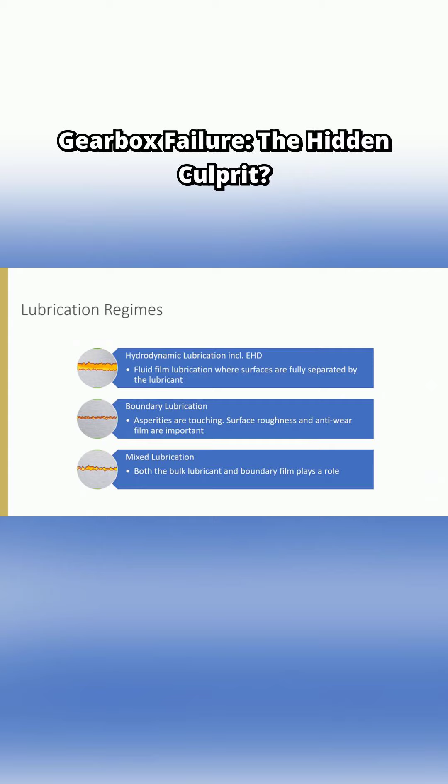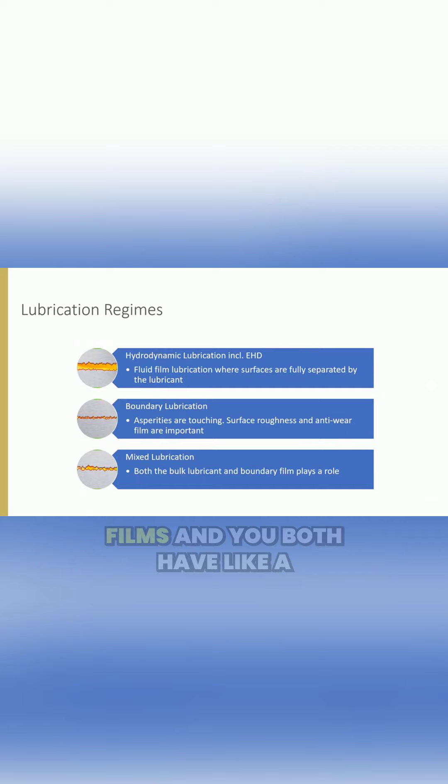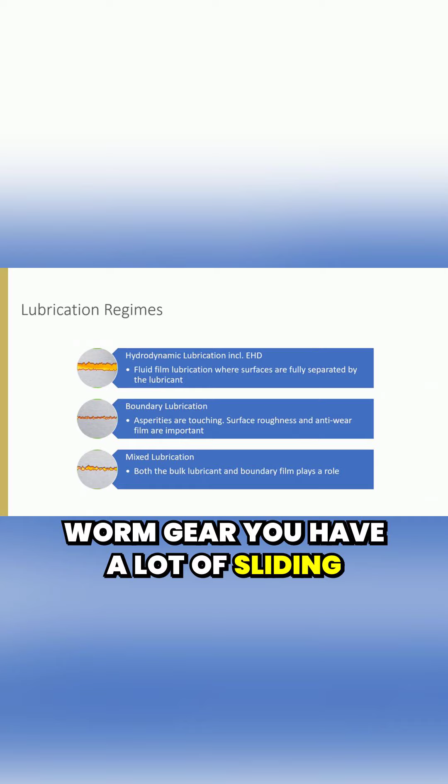So one of the worst things for boundary would be a gearbox where you start and stop the gearbox, and also in between the teeth you have a lot of very, very high pressure and therefore very, very thin oil films. And you have both rolling contact and sliding contact. And especially if you make the gears like that, so a bevel drive or even worse, a worm gear, you have a lot of sliding and therefore you need additives. Otherwise, you're going to break down the gearbox.

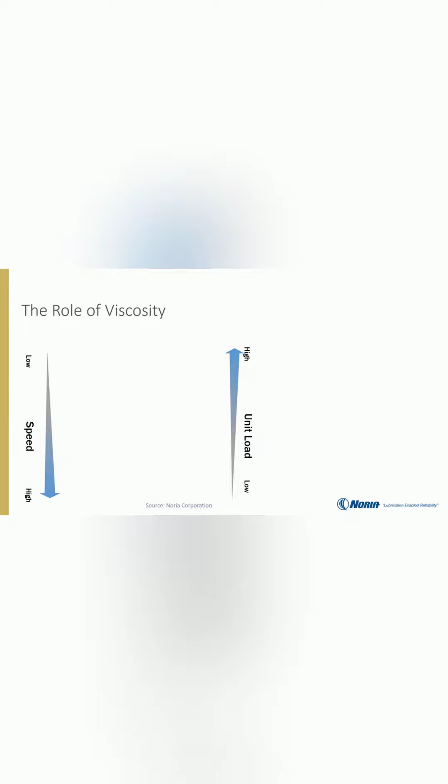Yeah, so one of the primary things for an oil, yeah. It goes through all three of them. You're right. Yeah.

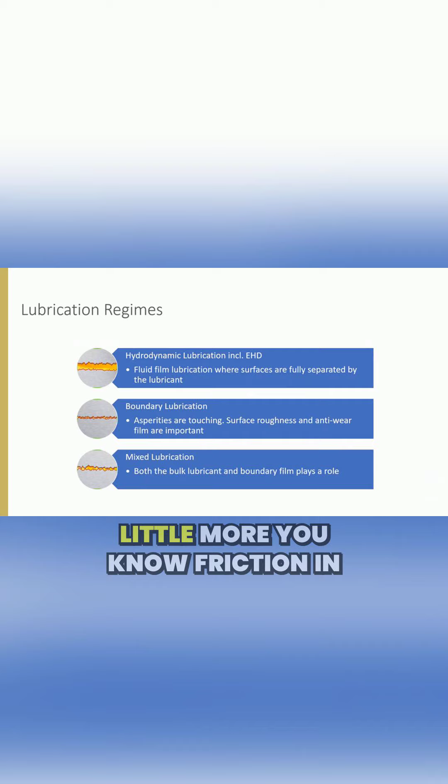Yeah. You could actually, let's say, like you say, 320, the oil is 320 normally designed for this gearbox, but to help me out, maybe because it's running very hot, I go to a 460 oil, and then I have less boundary lubrication because then I can carry more load because the oil is thicker. But then, of course, I'll also create a little more friction in the pump, and I'll also maybe create starvation in the pump if I can't suck in the oil.

I mean, if it's too cold. So there are also drawbacks. So sometimes additives are actually the best solution. Yeah, but good question. Thank you.

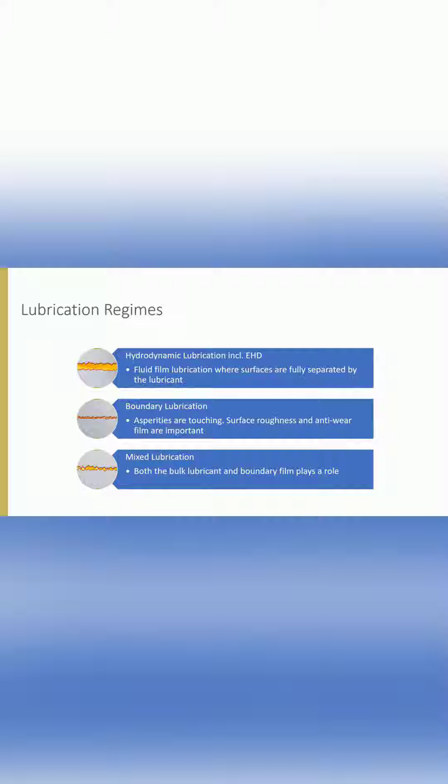Yeah, so the role of viscosity would be one of the most important things in oil systems: if you cannot have this thick fluid film or this carrying capacity of the oil, then you'll have a lot of friction and a lot of wear.

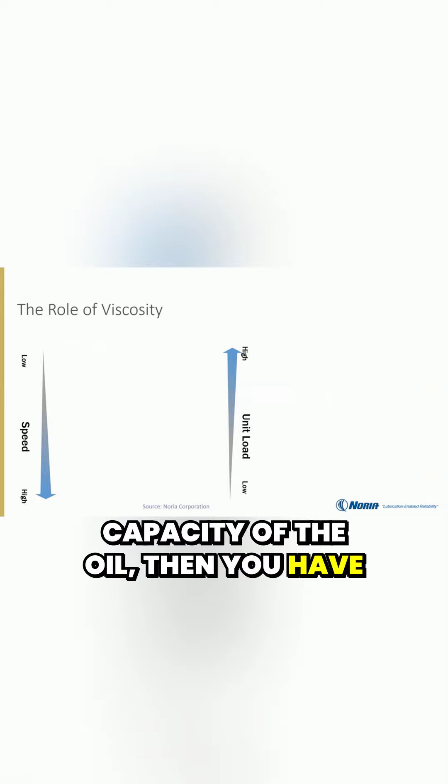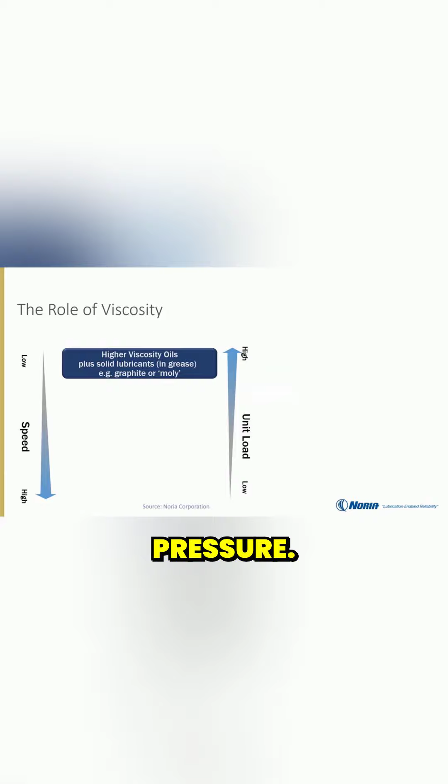So if we look at the highest load and very, very little rotational speed, that would be, for example, on a truck or a lorry, you have the kingpin, I think it's called, where you connect the trailer. There's very little rotation, only when you turn, but a lot of pressure. So there you're actually very often using a very high viscosity oil with some solid additives in. So graphite, molybdenum disulfide, Teflon, and so on.

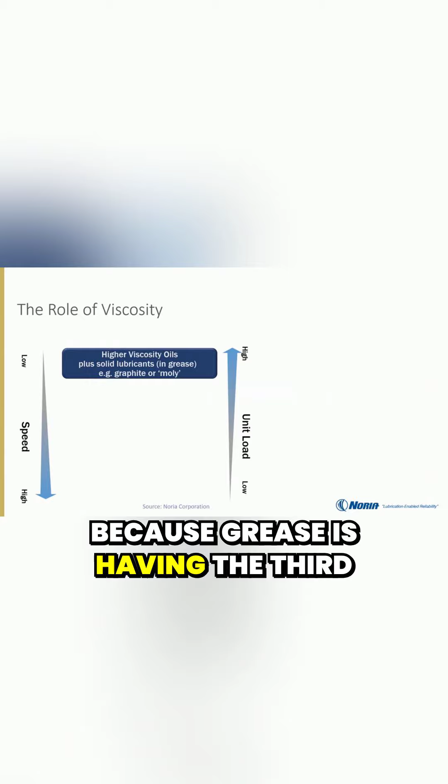But it's easier to keep it there if you have grease instead. Because grease has the third thing, the thickener, which is like a metal soap. So the solid additives stay in the sponge, you could say, and therefore it keeps them in place. It's very difficult to have graphite and Teflon and so on fully in suspension in an oil. If you send it around, it will most likely fall out. But in grease, it will stay there.

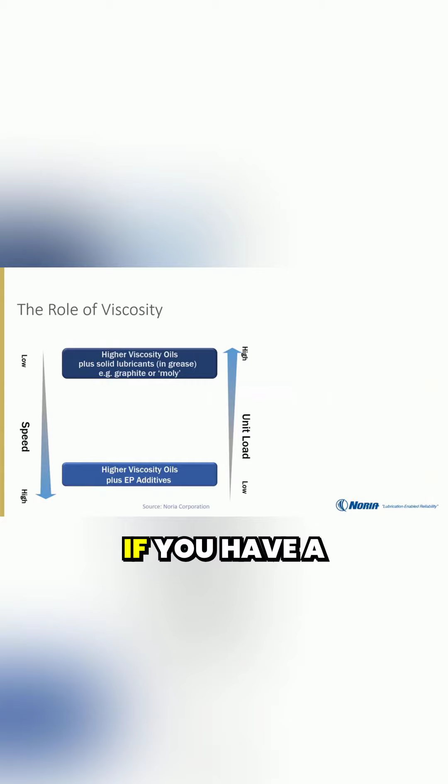If you have a little less load, but still high load and more rotational speed, maybe you need a quite viscous oil, so a 460 or 680 or something.